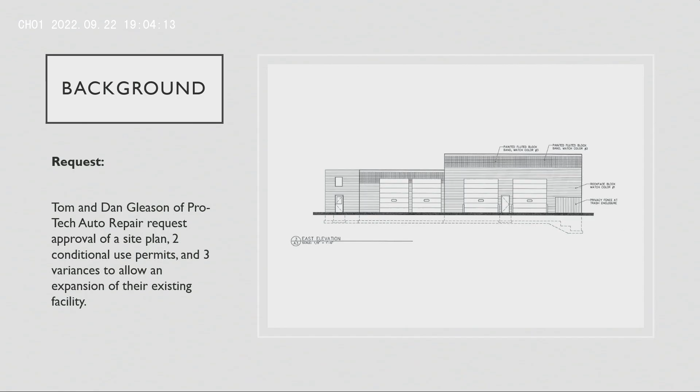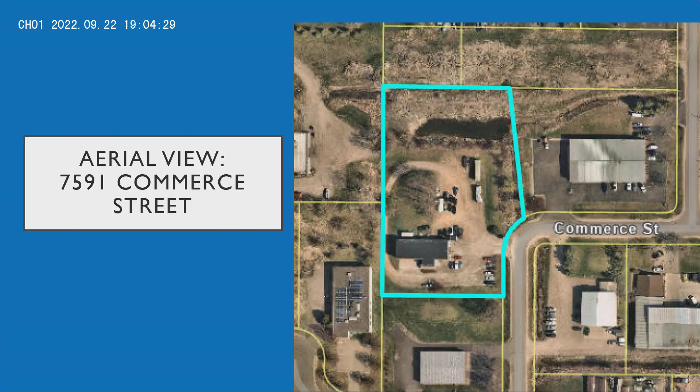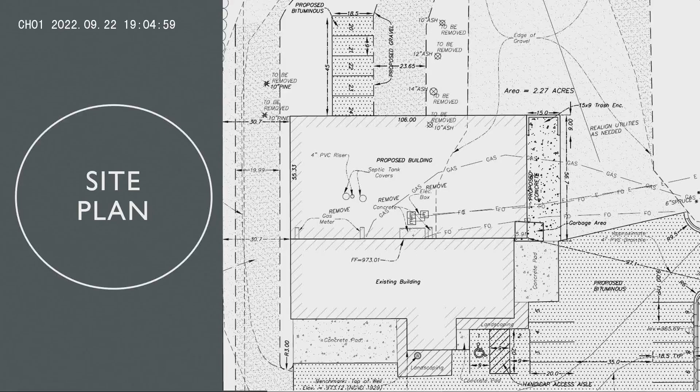This is a snippet of the site plan, most of what I could get to fit on a PowerPoint slide. Primarily the existing building is to the south, and the proposed building would pretty much double their footprint. As part of this, they would be paving the parking area to the south of the site and dedicating exterior storage on the northern end of the site with some spaces for employee parking as well. The proposed expansion includes additional space for the building of 5,865 square feet with repair bays and warehouse space for the equipment and materials.

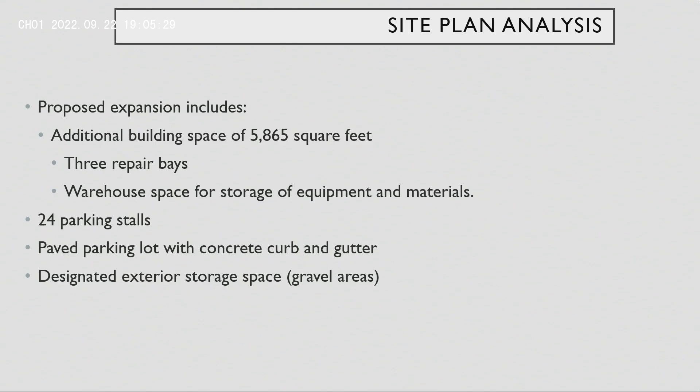The site right now shows 24 parking stalls, and the parking lot would be paved with concrete curb and gutter. The designated exterior storage space would be newly delineated, and they will use gravel areas for that space.

Overall, the plans comply with the district lot standards. For the exterior storage, more information about the existing vegetation is needed to confirm screening of outdoor storage. The screening can meet our 80% opacity year-round requirement for the conditional use permit, which we can discuss further when we go into the conditional use permits.

For the parking, what is proposed on the site plan would involve 3 variances, including the southern drive aisle width, the setback for the western drive aisle, and then expanding some parking spaces on the southeast portion of the site that were approved at a 20-foot setback. The plan shows 2 additional parking spaces at that setback when 50 feet is what's required at this time.

The employee parking on the north of the expansion needs to be shifted a bit further north in the site plan, just to show a separation between the building and the parking.

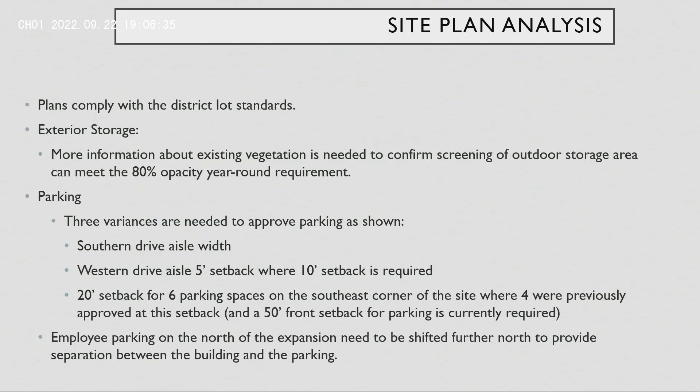The encroachment of the western drive aisle on the neighboring property does need to be addressed as a condition of approval of the site plan, regardless of the variances being approved. Right now it's encroaching, with one area encroaching as much as 2 feet into the neighboring property, according to their survey.

The revised plan must also show that the vegetation on the site provides the required screening for parking spaces 11 and 12. An email from the applicant last night suggested there is vegetation there that was not shown, so we just need an updated plan showing what is there.

Further expanding on landscaping, the calculations used were based on the building size, but our code requires the larger of either the building size calculation or a calculation based on the perimeter of the site. The perimeter of the site leads to the larger calculation of required trees.

Again, it's very possible the overstory and understory shrubs that are on the site currently are more than enough to suffice. I just don't know, because the current plans don't really show an inventory of what's currently there. So I just need some more information, and that is a condition of approval.

For streets and access, engineering recommends a concrete apron at the entrance of the site. That is not a condition of approval based on feedback that we received during the sketch plan. So if that is something that we want to change, we should definitely discuss that. But right now, the resolution presented for you tonight, that is not required.

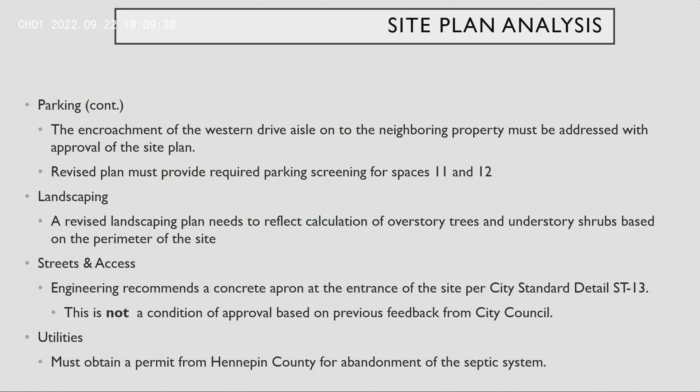So then further, for the utilities, the engineering memo identified a need for them to obtain a permit from Hennepin County to officially abandon their septic system on the site. And again, an update from the applicant the other night, sounds like their application for that has been submitted, so they're making progress there.

For the building materials, revised plans need to be submitted that indicate the expansion portion of the building will use an allowed building material. I believe the plan, based on conversations with the applicant, is for that to be integral colored block for the facades, but that is not what's shown on our current plan, so we just need an updated plan. And again, there were several items identified to be addressed in a revised grading plan, which is within the engineering memo, so that is something that they will continue to work through with engineering as a condition of approval.

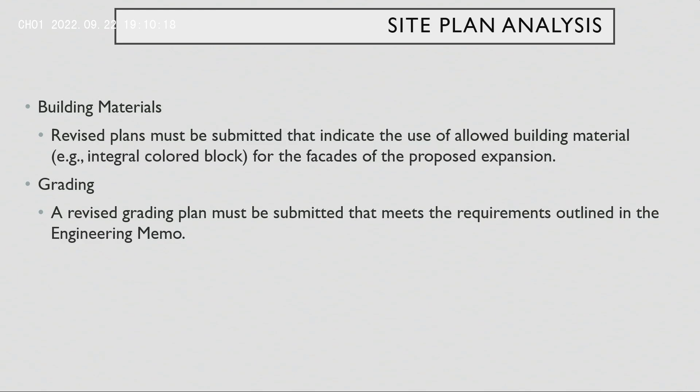For the conditional use permits, again, there are two. The first one is the waiver for upgrading the current building facade by 25% to an allowed material. So our CUP process does allow this to be waived, and the plan is for the expansion to include an allowed material and just not have to update their existing building because it doesn't really make sense with the concrete block that's existing.

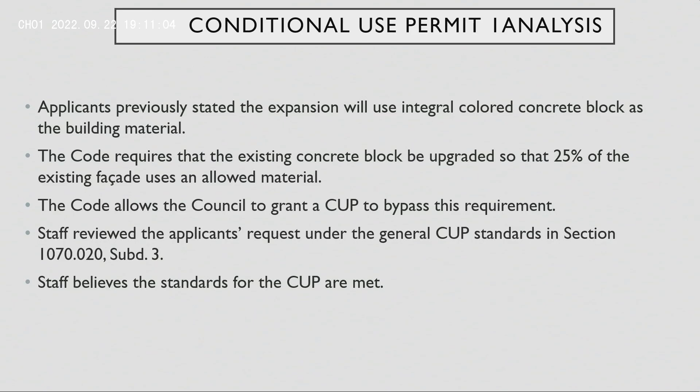The code identifies general standards for the CUP, and I do believe in my analysis these standards have been met. For exterior storage, that is also a conditional use permit.

And so with that, there are additional standards beyond our typical CUP process, which includes a screening requirement that exterior storage space meet 80% opacity year-round. Typically, that's done with a combination of fencing and vegetation. So that was really the only thing I identified as we need more information before we can say they have satisfied that requirement. All the other standards were met satisfactorily.

And again, an update from the applicant on Tuesday night stated a desire for the council to approve the existing vegetation on the site as is. And so that might be part of the discussion of whether or not you disagree with staff's analysis that it meets the 80% opacity requirement, or we have a couple of options if we want to discuss that further. So other than that, the remaining standards for the CUP have been met.

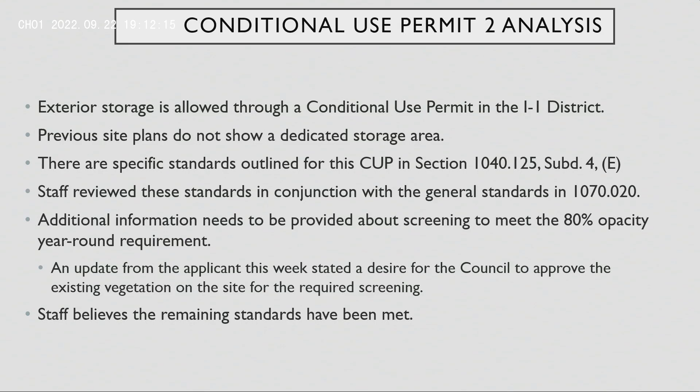So again, just to speak to that screening component, I am concerned about some gaps that are visible on the northwest side.

I don't believe that part's visible. It just looks like it doesn't really have the screening right there from the overhead view. And then I know driving on County Road 10, I can see those trailers from County Road 10, which is a little bit further back.

So I do think that we need some further vegetation there. And I'm also concerned about what the site looks like in the winter. I haven't had a chance to inspect it in the winter. When I went out, there was already vegetation, so again, that year-round opacity. I need a better understanding of what trees are present and the types of trees so that we can better evaluate whether the 80% can be met year-round.

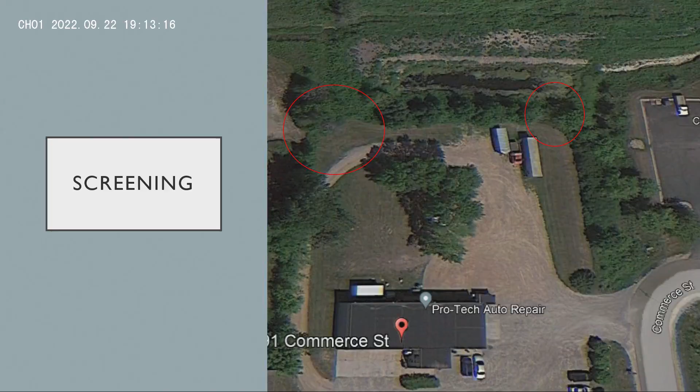Our city code requires a width of 26 feet. Overall, I believe the hardship standard has been met due to the constraints caused by the location of the pre-existing building and the many changes to city standards that were not foreseeable to the landowner when they made the decision to locate the building where they did.

As a way to mitigate the impacts of the variance, I recommend the parking lot be striped to clearly define where the drive aisle is. The Planning Commission did not recommend approval for this variance. The thinking behind that was that the expansion in 2000 was a decision by the property owner, and therefore they caused the condition that they're seeking a deviation from. That is certainly up to debate, but speaking to the city attorney, we think it is a unique constraint that the building location far predates our code.

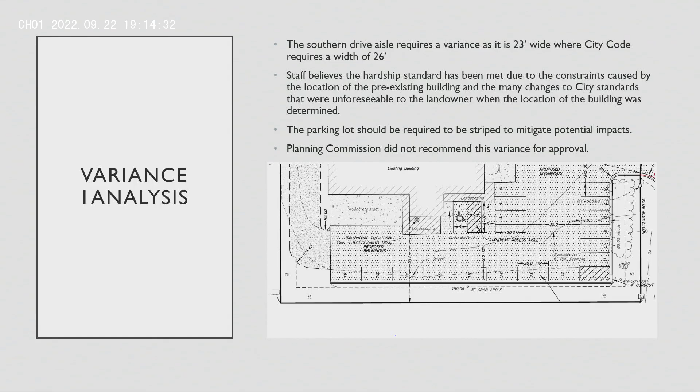Variance 2 is for the western drive aisle. The issue is they are proposing for it to be located roughly 5 feet into what should be a 10-foot setback. Again, staff believes the hardship standard has been met due to the constraints of the location of the building and the need for internal circulation of emergency and oversized vehicles that they serve. There really is no other option. There's no ability to fit in a hammerhead on the south end of the site.

The applicant should enter into an encroachment agreement with the city to address impacts of encroaching into our drainage and utility easement. This variance was recommended for approval by the commission.

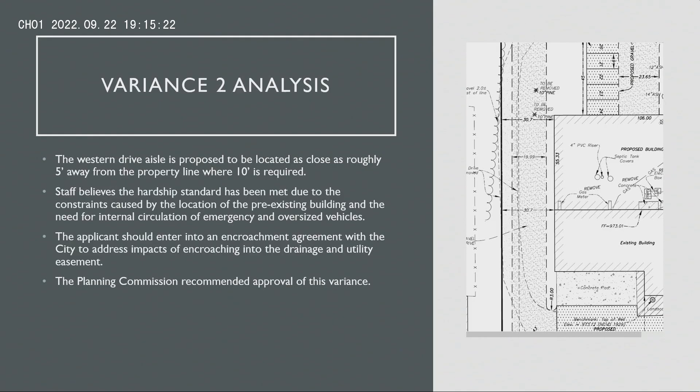Variance 3 is for the expansion of the non-conforming parking. As I said before, there are 4 parking spots shown in this area. On the left is the 2000 site plan, showing 4 spaces at a 20-foot setback, and on the right is the proposed site plan, showing 6. I do think 6 is reasonable. I've been to the site, and it comfortably fits 6 vehicles.

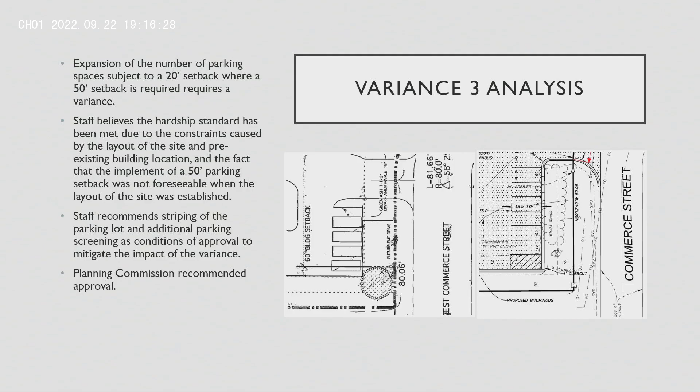However, the setback was only approved for 4 vehicles, and now we have a 50-foot setback. Due to the location of the building entrance, it makes sense for the parking to be where it's located. If we were to be strict about a 50-foot setback, it would locate parking in a really weird spot that would impact the drive aisles. So staff again recommends approval of this variance, and again recommends striping the parking lot so that we don't have further expansion of non-conforming parking. The Planning Commission recommended approval of this variance as well.

Overall, Planning Commission recommended approval of the site plan, CUPs, and 2 of the variances. Staff recommends approval of the resolution approving the site plan and 2 CUPs, and staff recommends approval of the alternative resolution in your packet, which approves all 3 variances. If you agree with the Planning Commission recommendation, that is the first resolution in your packet focused on the variances.

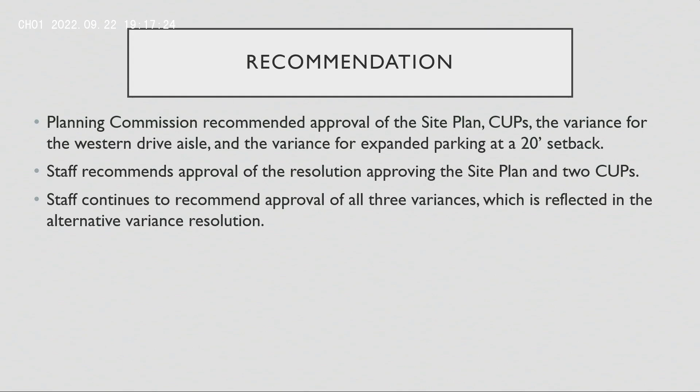Couple of questions I have. A lot of this stuff turned out really well, and I like what the Planning Commission has submitted to us. I've got a concern about landscape, a couple of concerns about landscape.

Do we know where, and the applicants are here, do we know where city water was brought in? They have city water and city sewer now? I believe they're connected. Where is that from, off the road? It's basically right up the driveway, to the northeast corner of the property, and there's a hole in the landscape right there, because that's where the connection is.

And then my question was, do we, the city, maintain that mitigation pond? I would say yes, we do.

So it left it rural, basically no curb and gutter on the street. A byproduct of that project was some concerns about drainage and lack of maintenance over 40 years, so we did some drainage work, Public Works did a lot of it, and we also outsourced some things to a contractor. There was also a watershed grant as part of that. So yes, that is a city drainage system that we would maintain.

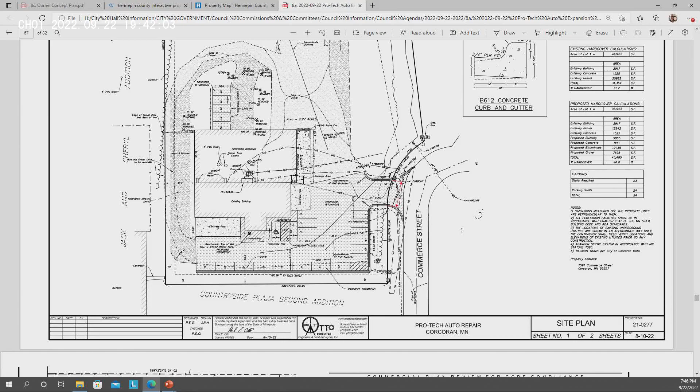There's a significant elevation change also from those properties to the west, down to the bottom of that wash. If I remember right, isn't there chain link already in there too? And then all the brush and stuff that has grown in. For it to be cleaned up, it would take a lot between the property owner to the west and them.

So it says in their narrative for the variance for the west drive aisle, we propose moving the drive aisle off the neighboring property and towards the current building. We will widen the drive aisle to get as close as possible to the 20-foot mark within the space allowed.

I'm hearing conflicting information, so if we want to further evaluate this, we may need to use our ability to extend the review period to 120 days, to allow for consistent plans to be submitted and update a narrative so we can update the variance and update the resolution, to exclude the removal of the encroachment and to require a private encroachment agreement between the two properties to allow for the gravel to remain.

I'm trying to see if there's a way to do that. Can I ask a question? Is it a city easement too, because does the city have to maintain that encroachment drainage? Yeah, because the primary goal and reason for that easement is to be able to maintain that drainage from the properties to the south.

One benefit of moving the drive off the property line would be the ability to develop some improvement there, where you could channelize the flows. When you build a road over top of an area that's draining water, you're having a fighting battle, which the applicant's describing. So I see that as a benefit of moving it off the property line.

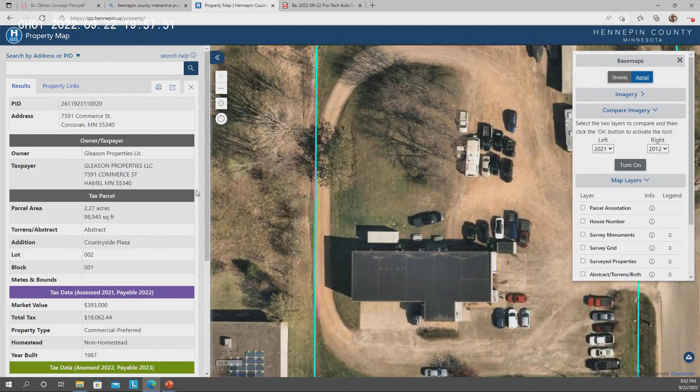We have two different recommendations, the staff recommendation and the planning commission recommendation, which is essentially a difference of one variance there. Any questions for staff or the applicant on that?

My understanding from earlier reviews is that the expansion that happened in 2000 is where that southern drive aisle was established, and there wasn't parking shown in that plan, but it was put in place at basically that time. Then the city adopted a new code in 2004, so there would be a restriction from 2004 forward, but as the site was originally planned and implemented, there wasn't a requirement in place in that area. Or, I'm not quite certain what was in effect in 2000, so it's either that there wasn't a standard or that it satisfied the standard.

So either way, it really was not a concern at that point. So the planning commission's recommendation not to go forward with that variance was based on the idea that the landowner created the issue, but I don't believe they created the issue if the requirement came into effect after they began using the site. I agree, so I would disagree with the planning commission on that. Therefore, I would be in favor of the alternative resolution approving three variances rather than two.

Want to make a motion? I so move. I would second that. Any further discussion? All those in favor say aye. Aye, aye.

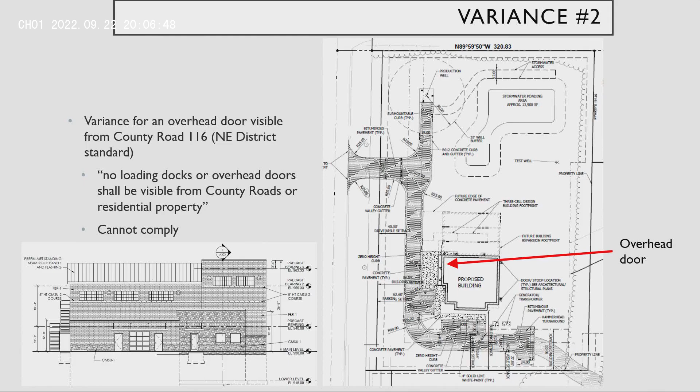The third variance is for an accessory structure, the well house in the front yard. A well house could simply be screened, or the well, instead of being a well house in a building, could be screened with a fence or landscaping, and that would comply with the code standards. However, for a variety of reasons, the Public Works Director prefers a building that's really a safety issue and a maintenance issue.

While either alternative provides compliance with the screening requirements, this accessory building in the front yard does require a variance from our code, which would only allow those in the side or rear yard. And the well itself cannot be shifted on this site. The well is where the well is. It could not be shifted east to be in the side yard. Therefore, staff does recommend approval of this third variance. Next slide.

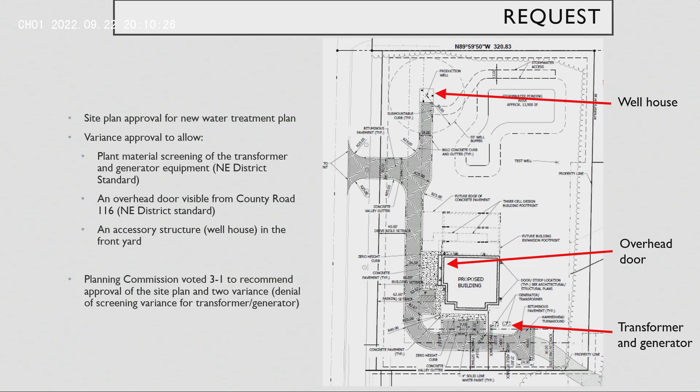Is this like a 12-foot kind of garage door type overhead door? Is it actually 12 foot on the plan? It didn't look like it was—this door down here, maybe it's a 10-foot door, but it's a smaller kind of overhead door to bring equipment in, so just due to the functionality of the treatment plant, we need that for it. Whether a swing door would meet code or not, that's a planning question, but for the use of that space, we would want that type of door. Okay, makes sense.

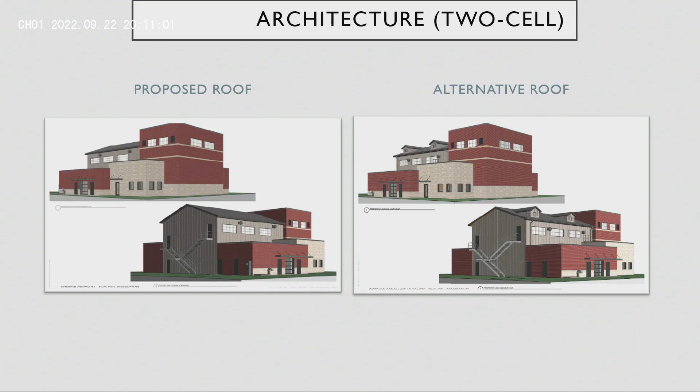My other question is on the generator variance—how big is the generator? Is there a fuel tank with this? Is it natural gas fired? Yeah, it would be natural gas. If you drive out around County Road 101, you know where our lift station is by the Lions Park—you see the generator there? Similar to that, it might be a little larger just for this facility, but that at least is a real life example. The pad is 18 feet by 8 feet that it sits on, both the transformer and the generator. We'd want some clearance around it, so it'd be that size with probably about 3 to 4 feet around it if we're going to add a fence.

Does a fence fit in the area as it's designed if we wanted to go that way instead of having vegetative screening? I think the fence fits, it's really functionality—we would have to add some gates, we'd work around that, just being able to get the equipment in that's necessary to maintain it. So we'd have to evaluate really where the gates fit, but we feel like this met the intention. We try to meet the intention while still giving the functionality of everything.

The other thing I want to be cognizant of is that it's facing residential, so we'd want to keep in mind what looks best of the options as well. That's probably the spot that will have the most future residential looking at it from the south and east. My initial thought was I would prefer to see the fence, just because it's infrastructure that's not extremely attractive on its own. Trees can be good, but they're not always healthy, and especially if we're not going to have irrigation on the site, there's greater risk of dieback over time. A nice fence can last a long time and not require much maintenance either, so I'd prefer to see it just go with the fence, personally.

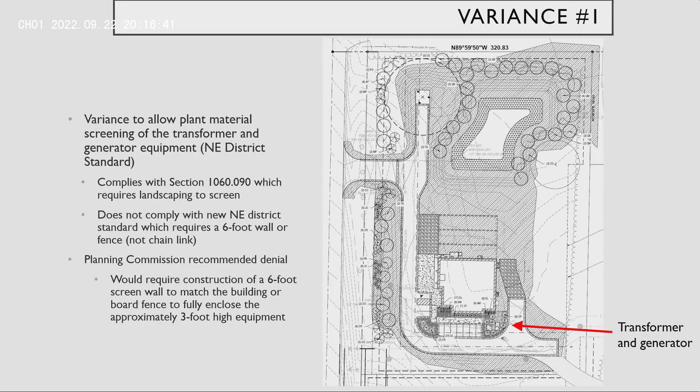I'd like to make the motion as written and recommended by the planning commission. Do I have a second? Any further discussion? If you pull up the last slide, you can see that summary. All right, all those in favor say aye. Aye. Okay, thank you, Kendra.

Thanks, Kendra. The further discussion is a little less impactful when it's just the three of us. Call back if I need to talk on that other item. All right, I will, if we do.

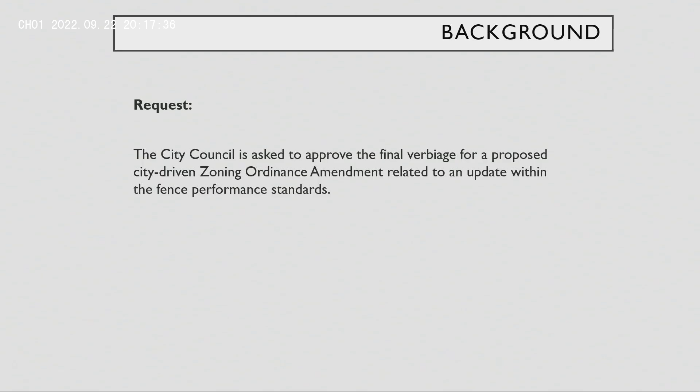The ordinance in front of you tonight proposes three changes to lot-related definitions, including adding definitions for lot frontage and interior lot lines, which are terms of art that we rely on, particularly in the fence standards. Additionally, back when we were thinking a lot more changes were going to be made to our lot-related definitions, we did have some discussion on modifying our lot width.

This is separate from the fence performance standards, but to be conscious of our resources and time, we thought if we're going to change everything else, we might as well look at this too. This would allow lots on a cul-de-sac to have their lot width measured at the required front setback, which would help with the flexibility our PUD districts rely on. I believe this would strengthen our underlying code, and hopefully encourage developers to stick to our standard plats, which is something we've talked about as a desire.

The Planning Commission did recommend that the updated definition be removed from the ordinance and handled separately, if at all. I would argue that we've already noticed and held the public hearing, so holding another public hearing on just this item, if council agrees with it in principle, would not be the best use of staff resources.

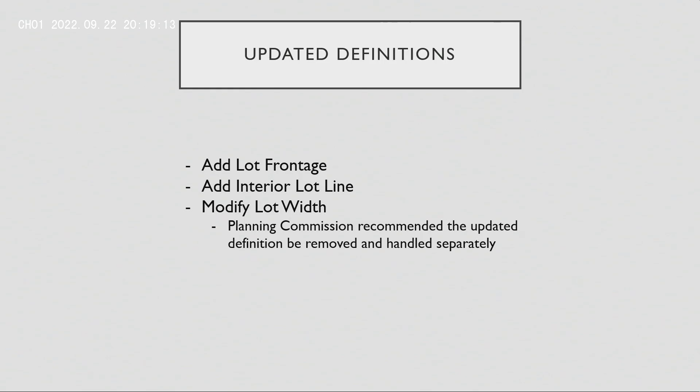For the fences and wall performance standards, the new verbiage clarifies when encroachment agreements are required and encourages adequate access for maintenance. There's a change to the threshold for zoning permits from a somewhat arbitrary rule of 6 feet from the property line to match our 25 feet from lot frontages requirement, which should cover both drainage and utility easements as well as easements for trails and sidewalks, and then 10 feet from interior lot lines or any drainage and utility ponding easement to cover lots that have a pond or wetland.

The verbiage would allow fences up to 7 feet tall and 100% opacity to be placed as close as 25 feet to the front property line or the principal structure setback of the underlying district, whichever is less. There's an exception for properties with frontage on an arterial road.

The Planning Commission recommended we allow some flexibility for these properties, so it's a 100-foot setback, but they could reduce this to 60 feet with additional landscaping by utilizing a flexibility clause we already have for building setbacks. Additionally, there's a specification that fences cannot interfere with a 30-foot sight visibility triangle measured from intersections as well as driveways, both on the property for the fence and on adjacent properties.

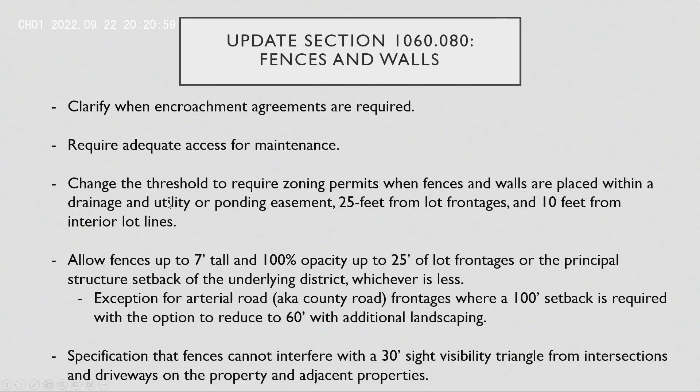Conversations with Public Works after our last discussion led to adding some performance standards for swimming pools, spas, and hot tubs. It's not necessarily that staff feels particularly strongly we do this, it's just that we get this question regularly, and since we're already evaluating this, it's good to have as a discussion point.

The Planning Commission recommended we remove these standards. The motion seemed contingent on it being duplicative of what's in state statute. I confirmed with Mike, our construction services specialist, who did some research for me, that the state rule is specific to public pools, and the state building code also excludes regulation of private pools covered by the International Building Code. So ultimately, Minnesota has decided to leave this up to cities to regulate private pools.

And this language would apply to private pools, not necessarily a swimming pool that exists today without a fence, but future pools that are installed.

Additionally, Public Works wanted to add specific wall standards for retaining walls, particularly when they're along a right-of-way or public trail and there's a drop within so many feet of that trail, so that we can require a fence. It's something we've been able to work through with developers, but requiring it in code would give us a lot more ability to say this is a requirement, you're going to do this.

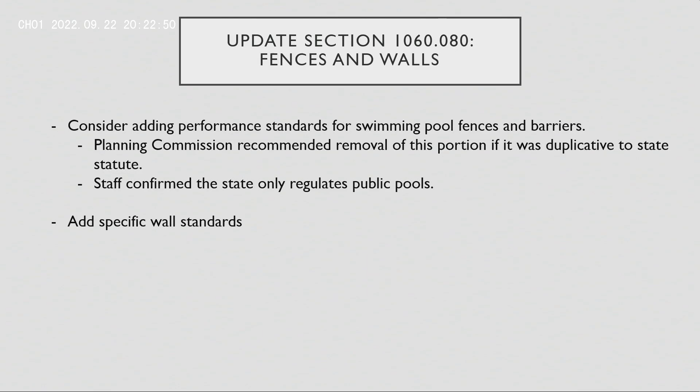So the recommendation: Planning Commission recommended approval with the caveats discussed on the lot width definition and the swimming pool fences. Staff recommends approval of the ordinance as written, which includes both those items, and the resolution approving findings of fact, as well as the summary ordinance. But since we are down a member tonight, that specific item should be moved to the following meeting, and we'll probably add that on consent. We can rule on the other two.

And I think I already went over both those explanation points below, so that is what I have for you tonight. Very good, thank you.

Anyone want to start off the discussion? I think we generally have, because we've seen it a lot and discussed it a lot, have agreement amongst us and Planning Commission and staff on the main body of this amendment.

The other points Natalie brought up were the cul-de-sac width issue and the pool fencing issue. I don't know where you guys stand on those. I'm fine with the ordinance updates as written, but I wanted more detail on any justification from the Planning Commission why we wouldn't want to update the lot width definition.

I really don't want to put words in their mouth, and I can't remember exactly what was said. I feel like there was one member who would prefer the city kept our standards strict, so it would force developers to ask for flexibility we get to decide on later. I think this contradicts some of the goals we've identified as staff and council, which is to strengthen our underlying codes so people rely less on PUD flexibility.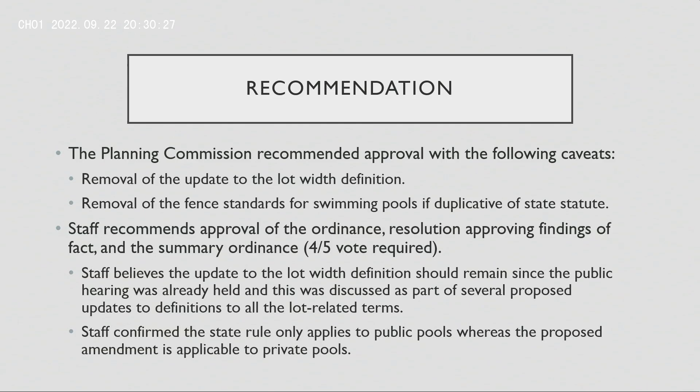So if I remember right, we're doing a cost share because the way we're doing the mass grading and stormwater enables additional development to use the same stormwater ponding. So this is a way to incentivize and lower the barrier for additional development in the downtown area.

Couple things there, if I can take them one at a time. The benefit—whether we had individual grading internal to St. Therese or were absorbing it into a regional pond—we still would have pursued a cost share on a project like this, due to how you mass grade a site. The soils underneath, you have to peel out the bad soils and bring in new soils. If you do them independently, you're importing and exporting a ton more dirt. If you have a larger area, you can balance the site better. So regardless of the stormwater maintenance agreement, we still would have pursued a project like this.

The second part of your question: we talked about doing a stormwater pond. Regional ponds allow for denser areas, more benefit, consistent with our southeast plan. This pond really only serves the remaining portion of our site and St. Therese, so I'd categorize it as a sub-regional pond. It's not really going to take more water from any other development other than the St. Therese property, and potentially anything else on our city hall property. Did that answer your question, or did I miss something?

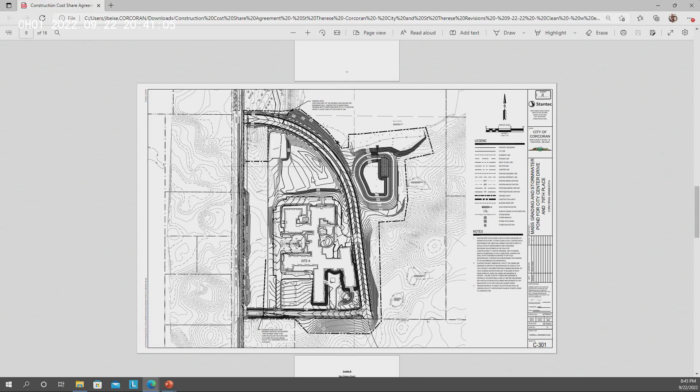There are a few policy options to consider: what type of administrative fee we'd want, whether to charge a fee for refunding and refinancing, whether to have a credit rating or denomination requirement, whether to have an application fee for host approval, and whether to require an application. Those are a few of the policy items we'd want discussion on tonight.

I'd envision us having discussion on the policy, maybe bringing back an incorporated version of it later. But tonight we have the formal request in front of us and could either move forward as issuer of the bonds and hold the public hearing, or move forward with host approval. Those are the two options to continue this financing mechanism for the project.

I do believe we have Calvin from St. Therese joining us virtually. If Calvin can't connect due to technical issues, he called me today so I've got his contact information if needed. With that, I'd take any questions, and we also have Gina here, our bond counsel, if you have specific questions related to this project.

We'd look at the fee proposed by St. Therese, which was $50,000. In some draft options for the policy, it could really range, and we could put in whatever amount you'd like to see. It varies across the state — I spoke with the city of Delano and they didn't have any fees for bond conduit financing, but I've seen others with 1% or somewhere in between. So there's a big variety and some good discussion points there.